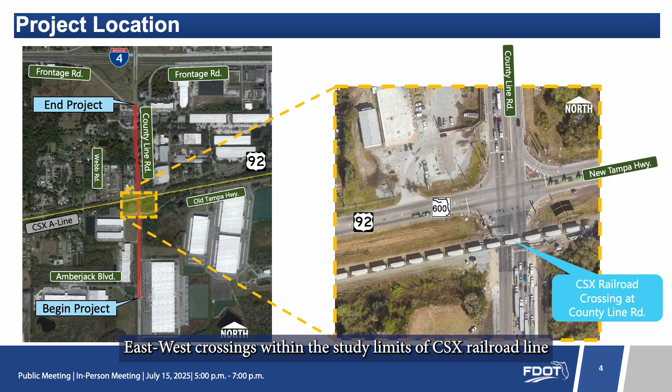County Line Road serves as the dividing line between the city of Plant City in Hillsborough County and the city of Lakeland in Polk County. The study location begins at Amberjack Boulevard and extends north approximately 0.93 miles to Frontage Road South. County Line Road has two major east-west crossings within the study limits of CSX Railroad Line and US 92, or SR 600, or New Tampa Highway.

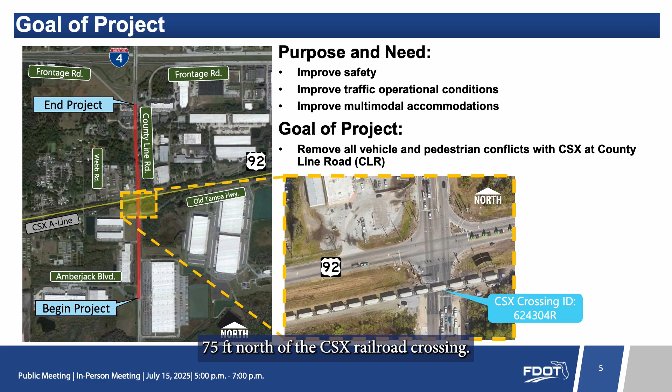The purpose of the proposed improvements on County Line Road is to improve safety, improve traffic operational conditions, and improve multimodal accommodations. The proposed improvements to County Line Road would be focused on the existing at-grade CSX Railroad crossing, crossing ID 624304R, and the US 92 intersection, located approximately 75 feet north of the CSX Railroad crossing. The goal is to remove all vehicle and pedestrian conflicts with CSX Railroad on County Line Road.

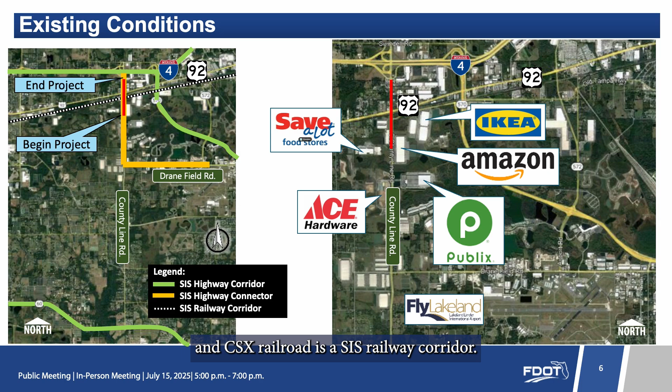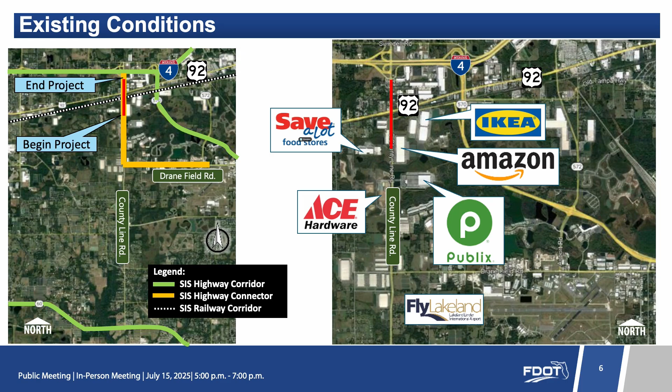County Line Road is designated a Strategic Intermodal System, or SIS, highway connector, and CSX Railroad is a SIS railway corridor. The corridor's study area also has numerous warehouses, like Amazon, IKEA, and Florida-based Publix Grocery, that provide the local area needed resources. The County Line Road at-grade crossing experiences many delays caused by the railroad traffic and buses or trucks that are required to stop regardless of whether the gates are down.

The CSX Railroad A-Line crossing on County Line Road is DOT crossing number 624304R, with 15 trains per day at a maximum speed of 79 miles per hour. The CSX Spur crossing of US 92 is DOT crossing number 643801U, with 2 trains per day at a maximum speed of 10 miles per hour. The goal of this project is to remove all vehicle and pedestrian conflicts with CSX at County Line Road and also minimize impacts to the CSX Spur crossing of US 92.

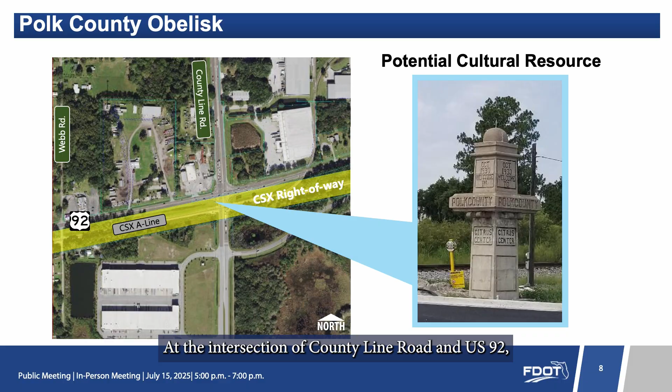At the intersection of County Line Road and US 92, the Polk County Obelisk stands as a signal for travelers entering Polk County from Hillsborough County. The Polk County Obelisk is located in the southwest quadrant of the intersection in CSX Railroad right-of-way. The obelisk is a potential cultural resource that will be evaluated as part of this PD&E study.

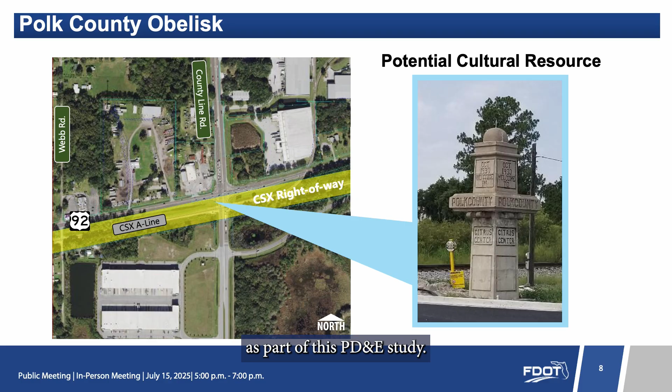Safety is a key consideration for this study. Based on the 5 years of crash data from 2018 to 2022, there were 421 crashes within the study area, and none resulted in a fatality. Over 48% of crashes were rear-end crashes.

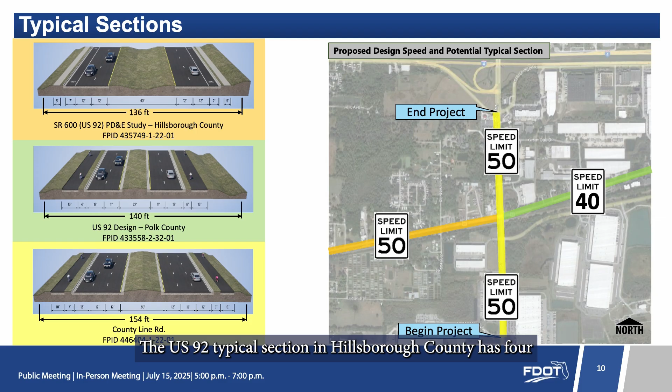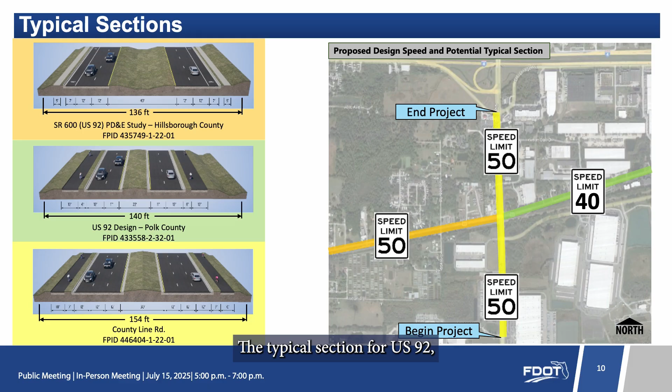The project has 3 typical sections. The US 92 typical section in Hillsborough County has 4 12-foot travel lanes, 7-foot bike lanes, and a 40-foot median within a 136-foot proposed right-of-way. The typical section for US 92 in Polk County has 11-foot travel lanes and 2 12-foot shared-use paths. County Line Road has a proposed typical section with 12-foot travel lanes and 2 10-foot shared-use paths within 154 feet of proposed right-of-way.

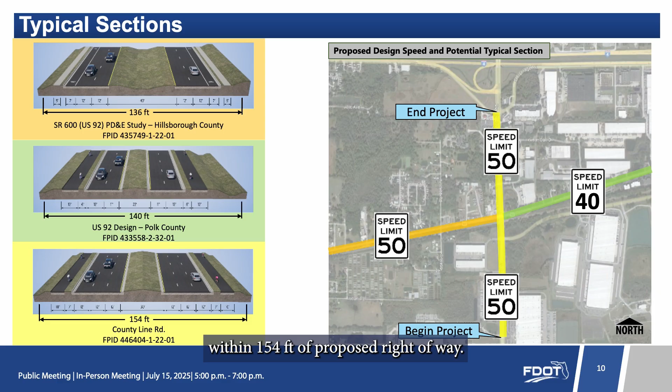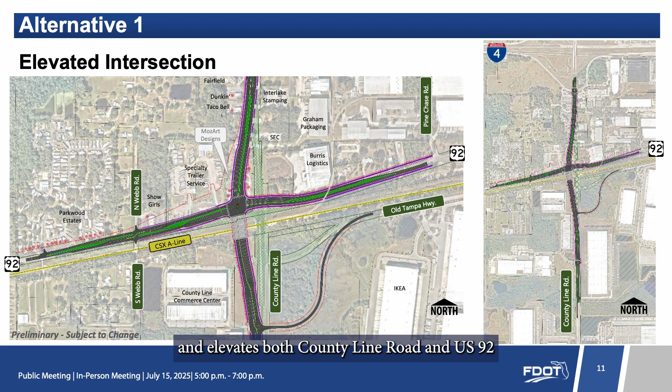3 build alternatives have been developed for this study. Alternative 1 realigns County Line Road to the west and elevates both County Line Road and US 92 to an elevated intersection.

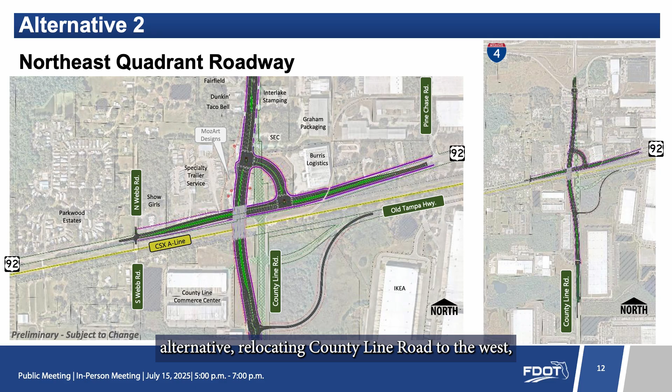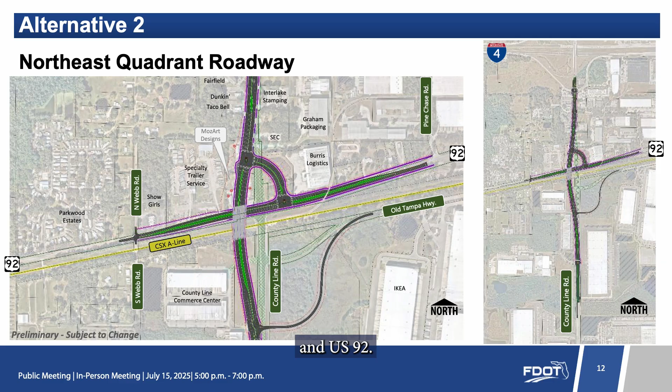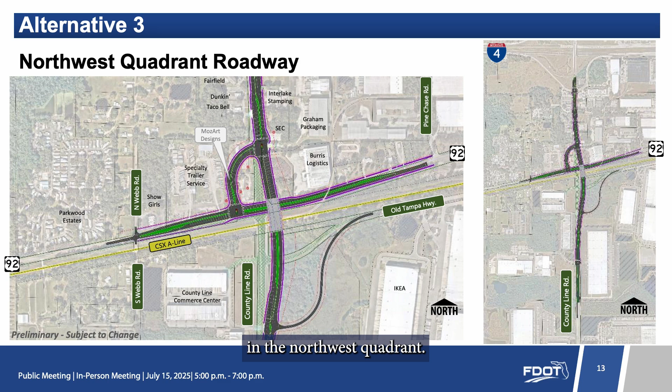Alternative 2 is a quadrant roadway alternative, relocating County Line Road to the west with the quadrant roadway in the northeast quadrant. US 92 remains at grade, with County Line Road elevated over both CSX A-Line and US 92. Alternative 3 is a quadrant roadway alternative, relocating County Line Road to the east with the quadrant roadway in the northwest quadrant. US 92 remains at grade, with County Line Road elevated over both CSX A-Line and US 92.

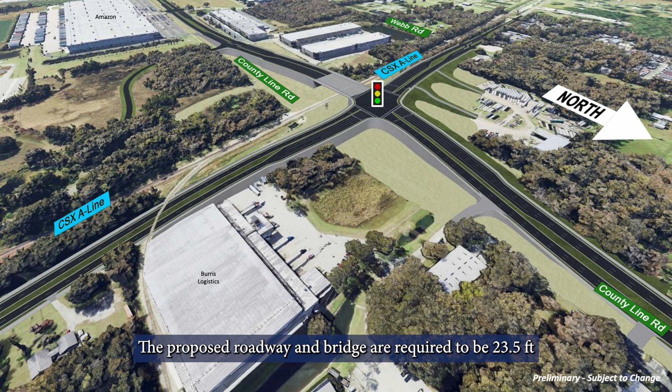This image shows the existing aerial view looking south with the County Line Road and US 92 intersection in the middle of the view. Alternative 1 realigns County Line Road to the west and elevates County Line Road over CSX Railroad. The proposed roadway and bridge are required to be 23.5 feet above the railroad tracks. Vehicles traveling westbound on US 92 wanting to go southbound on County Line Road will make a left at the intersection. Vehicles traveling eastbound on US 92 wanting to go southbound on County Line Road will make a right at the intersection.

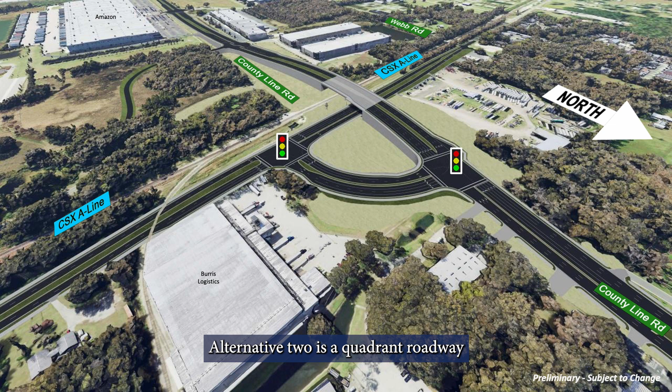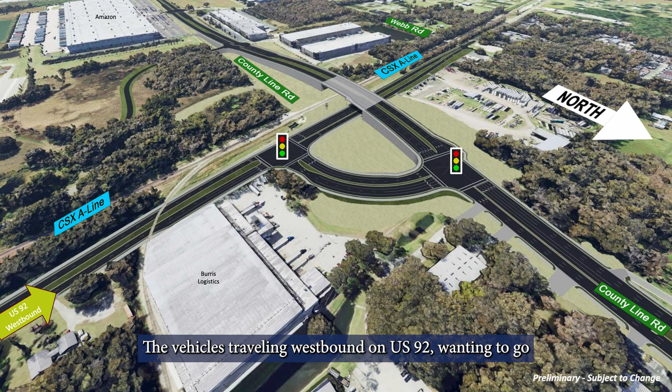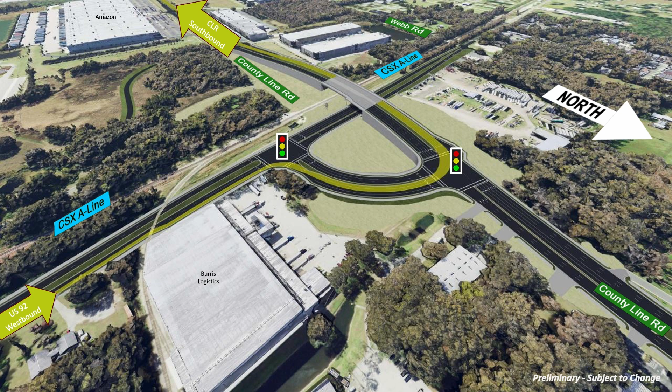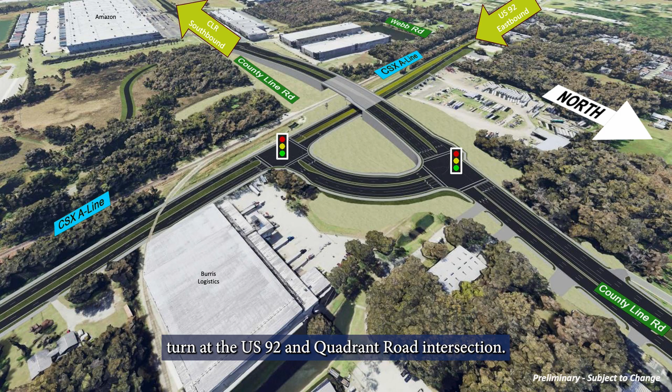Alternative 2 is a quadrant roadway alternative that realigns County Line Road to the west and is elevated over US 92 and CSX Railroad. The vehicles traveling westbound on US 92 wanting to go southbound on County Line Road will make a right turn at the US 92 and Quadrant Road intersection, then travel along the Quadrant Road, and then turn left at the County Line Road and Quadrant Road intersection to head southbound on County Line Road. Vehicles traveling eastbound on US 92 wanting to go southbound on County Line Road will make a left turn at the US 92 and Quadrant Road intersection, then travel along the Quadrant Road, and then turn left at the County Line Road and Quadrant Road intersection to head southbound on County Line Road.

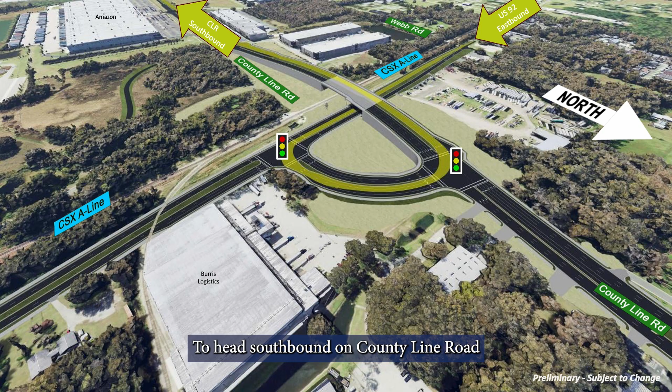An evaluation matrix showing a detailed comparison of the three alternatives and the no-build alternative is on display here this evening. The matrix shows potential effects on the social, cultural, natural, and physical environments and identifies preliminary costs. At this time, FDOT anticipates completion of this PD&E study by summer 2026. The study schedule is on display this evening. Currently, the PD&E project is funded, the design phase is partially funded, and the right-of-way and construction are unfunded.

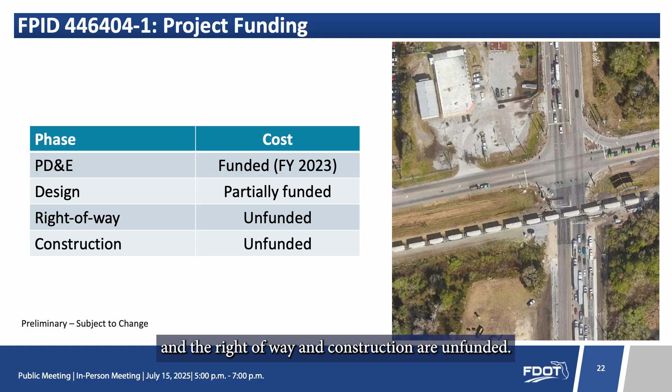We invite you to share your thoughts on the project, whether it's to express support, raise concerns, or ask questions. Your feedback helps the project team better understand your perspective. Submitting a comment is easy, and there are 3 convenient ways to do that. First, provide the printed comment form at this meeting. Second, visit the project website and complete the online form. Use the website address or QR code to access the website. Third, send comments by mail or email to Adam Rose, FDOT Project Manager, Florida Department of Transportation, 801 North Broadway Avenue, MS1-40, Bartow, Florida, 33830. Email adam.rose@dot.state.fl.us. Please provide your comments by Monday, July 28, 2025, to be included in the official project record.

The Florida Department of Transportation is required to comply with various non-discrimination laws and regulations, including Title VI of the Civil Rights Act of 1964. Public participation is solicited without regard to race, color, national origin, age, sex, religion, disability, or family status. Persons wishing to express their concerns about Title VI may do so by contacting either of the following: Cynthia Sykes, the District 1 Title VI Coordinator with Florida Department of Transportation. Address is 801 North Broadway Avenue, MS1-40 in Bartow, Florida. Zip code 33830. The telephone number is 863-519-2287, and email is